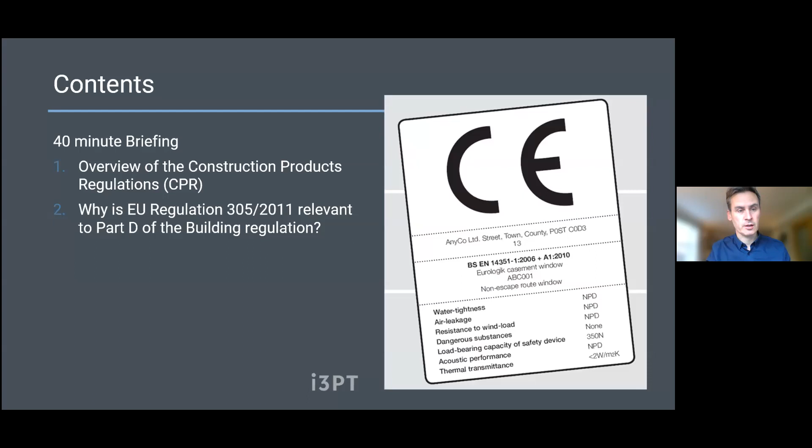So we'll start with the Construction Products Regulation, which is the European directive from 2011, relevant to construction products and how they're certified. We'll then talk about how that has been written into Part D of the building regulations. We'll also look at what products it applies to. It doesn't apply to all products, but there's a list of approximately 450 products in an EU database covered by harmonized standards. And what if the product has no standard? We'll look at that as well.

We'll also talk about the duties and responsibilities. So who's responsible for fitness of purpose? And then we'll get into some case studies and known risks, specific to certification risk, and also to things like structural components.

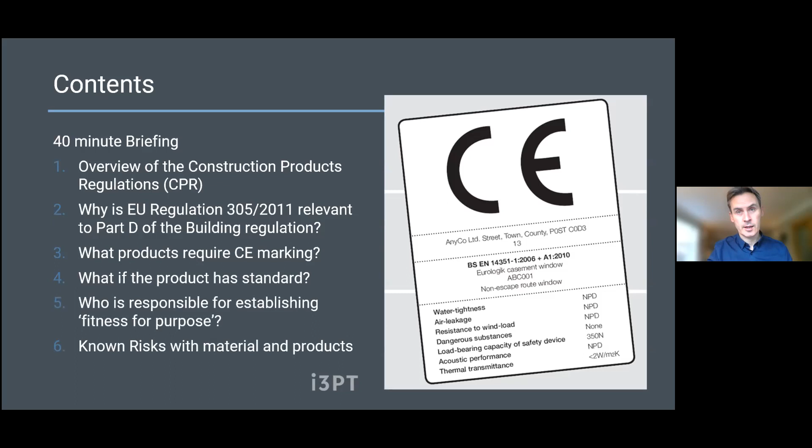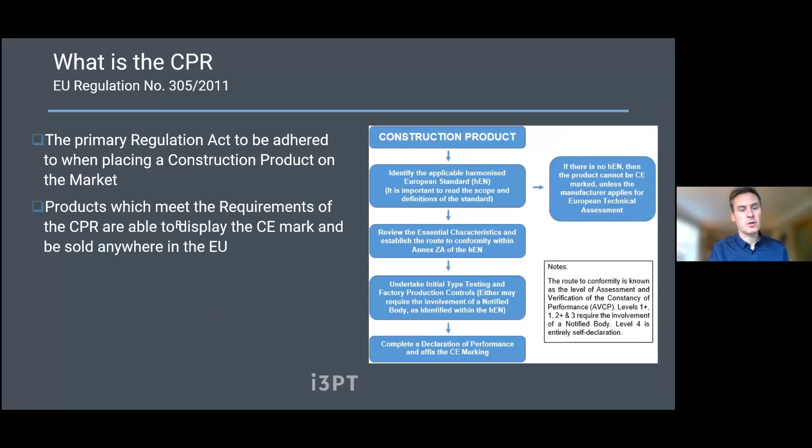So the Construction Products Regulation, also known as Regulation 305 of 2011, is the primary regulation to be adhered to when placing a product on the market. Manufacturers have responsibility for understanding the CPR and for adhering to its requirements where particular standards apply to their industry. Products which meet the requirements of the CPR are able to display the CE mark and be sold anywhere in the EU. The CPR applies a system of harmonized technical specifications and an agreed system of verification and constancy of performance.

So for construction products, if you were manufacturing a particular component, let's say you were a steel fabricator, you would identify what the harmonized standard is. So it's EN 1090, and then you would look at what essential characteristics you need to test for and display. Within that standard, at the very back, there's an Annex ZA of that harmonized standard. That will tell you which characteristics need to be measured. In some cases, for glass, it's only one component, but for other products there's maybe 8 or 9 different characteristics - deflection, conductivity, things like that - that need to be displayed on that declaration of performance.

The manufacturer then undertakes specific testing, and then completes a declaration of performance. They write up a declaration of performance, and their notified body, which is the third party, is able to give them permission to affix a CE mark to that declaration of performance. So you can have a declaration of performance without CE marking, but you can only apply CE marking if the DOP meets the harmonized standard's essential characteristics. And if there's no harmonized standard, then CE marking doesn't apply, except where it's voluntary. We'll get into that a bit more.

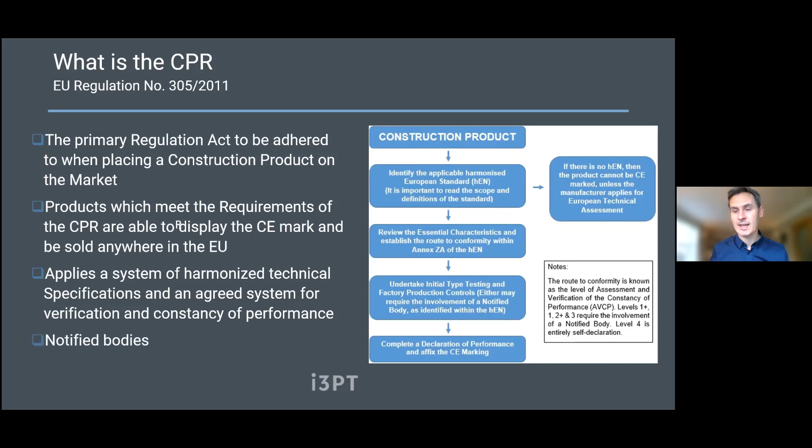So CE marking, it's not a quality mark per se, but it is an indicator that a product has gone through certain procedures, and it does relate to a standard that's harmonized across the previously 28, now 27 countries of the EU. So it's a declaration by the manufacturer that the product meets the requirements of the applicable European regulation. In this case, the Construction Products Regulation, but it could equally be the Lifts Directive or the Machinery Directive or the Electromagnetic Directive. Now, it's designed as a route to market and to break down technical barriers to trade.

It's not designed as a compliance mechanism to say that a product is fit to be used on a construction site in a particular application.

So declarations of performance are compulsory where harmonized European standards exist. Where the standard exists, there's a certain period of time in some standards under which you have to transition from the old standard to the new standard. We saw that with steel fabrication, that they actually needed to have material going through their fabrication units in order to put in place a factory production control system and a quality assurance system. So sometimes there is leeway before the regulation, or between the standard being harmonized and between it being applied.

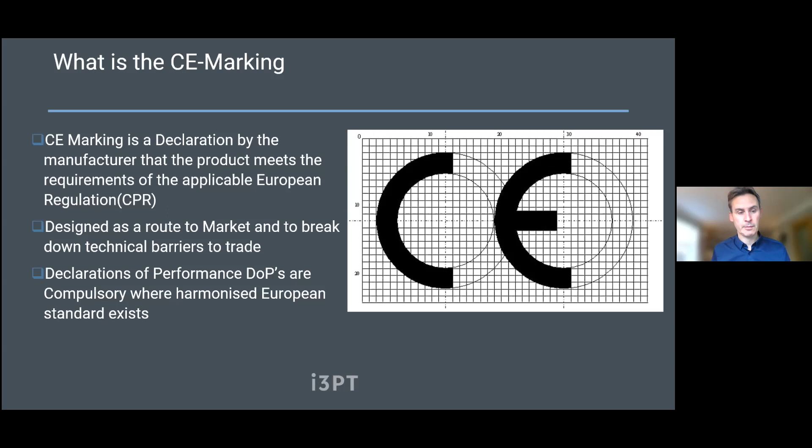So a declaration of performance serves to allow manufacturers provide information on the intended use of the product and the essential characteristics for that declared use. So the essential characteristics are those measures of performance, as I mentioned, the compression, the thermal conductivity, the bending moment, the glass transmittance, U values, things like that, conductivity.

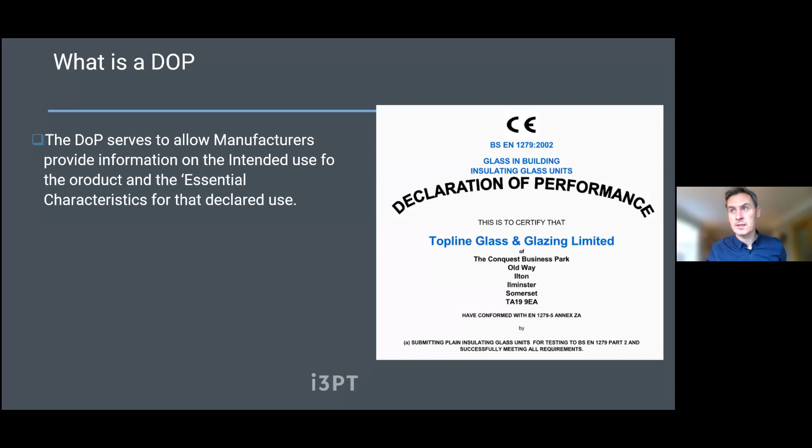So the manufacturer and the distributor assumes responsibility for the conformity of the construction product. So the responsibility primarily with CE marking is with the manufacturer and their agents, their distributors. So the designer or specifier makes choices of products on the basis of information contained in the DOP, using it to source those essential characteristics on which they can use their professional judgment.

So in the case on the right, it's a declaration of performance for glass, and it tells us the company name and it tells us the standard. So this glass conforms with EN 1279, Part 5, and the Annex ZA of that sets the criteria for insulating glass units.

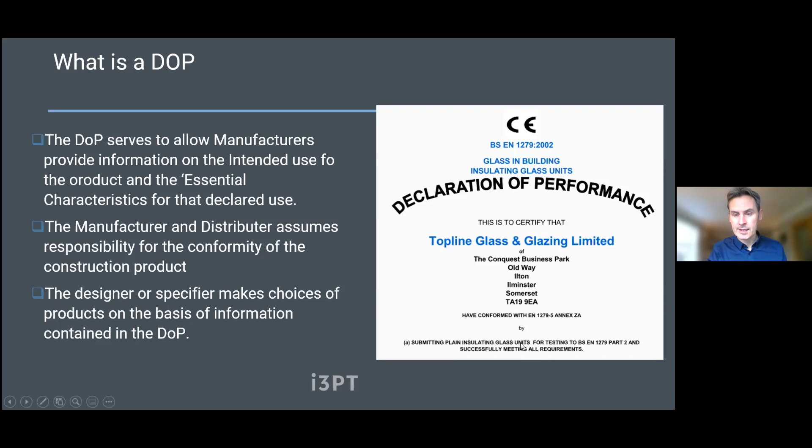So if you're a manufacturer of a product, what are the steps that you have to take? The first route is that you will look at the EU database and you will determine, is there a standard that applies to your industry? If there is an applicable standard, and I can demonstrate where you source that, the NANDO database, that standard will have a list in the Annex ZA of the essential characteristics.

Then you'll determine from that whether you need a third-party notified body. So in Ireland, the notified body of choice really is NSAI, and this is their information. In France, it might be Kiwa, but in the UK, the notified bodies would have been BRE, BBA, Exova.

And the challenge with CE marking is they're no longer recognized for the purpose of EU regulations. So determining if a notified body is required means checking if you need a third party like NSAI to visit your factory, review your tests, or look at your technical specification. That will tell you then what tests you need to do.

So, do you need to do fire testing to work out the reaction to fire? Do you need to do compression testing? Do you need to do heat box testing for conductivity? It'll work out all that. And a lot of those tests, if you're a manufacturer, you probably have them anyway for a product.

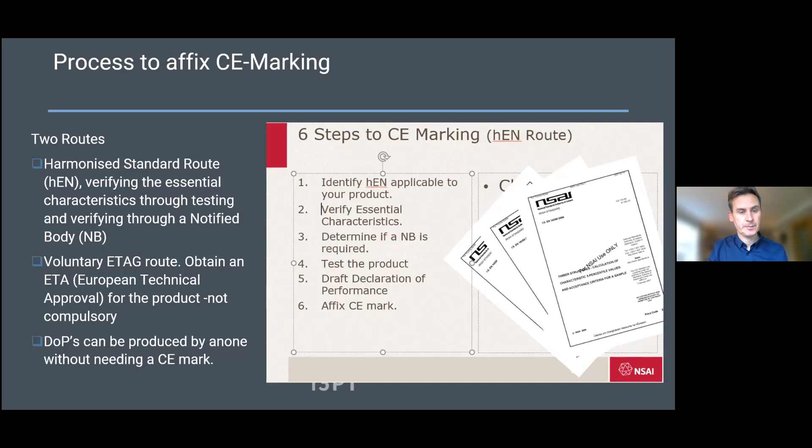So I suppose with that information, we have to see, well, what does CE marking do and what is it not doing? So CE marking is primarily a marketing tool. It's facilitating open access to products across the European market, enabling free movement of goods throughout the EU member states and beyond.

So if you want to choose a block and it's coming from Estonia, you want to know that if you look at the characteristics of that, it's undertaken the same testing, that is measured in the same way as a block that's come from Kilsaran down the road.

It places responsibility with the manufacturer or the importer, whoever's the economic operator that places the product on the market. And it's really about self-certification. A lot of the information is coming from the manufacturer, but being verified by the notified body to one of three levels of veracity, and that's what we get into. They're the AVCP systems. It allows the manufacturer to declare performance and place the product on the market.

But what does it not do? So it's not evidence of compliance in and of itself. It's not a quality mark. It does not on its own provide compliance with national building regs, and it does not necessarily indicate that a product satisfied any pass-fail criteria. So it's a big part of us saying that a material is fit for purpose, but it's not the full story. You can base your professional judgment on it.

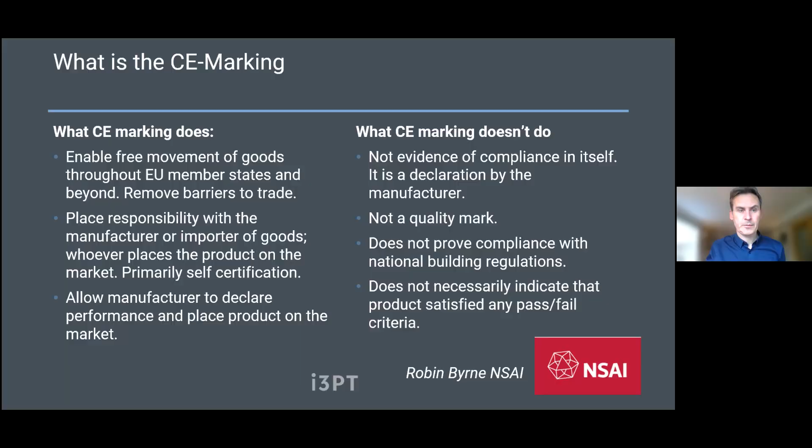Okay, so just going into that. So the purpose of the construction products regulation, that covers, I think it's 447 at last count, construction product standards.

It's mandatory to have a declaration of performance and CE marking for products that fall under those 447 standards. It's the duty of the manufacturer, importer, and distributor. The declarations of performance use AVCP assessments of performance and verification of factory control, and that has to be attested by a third-party body called a notified body.

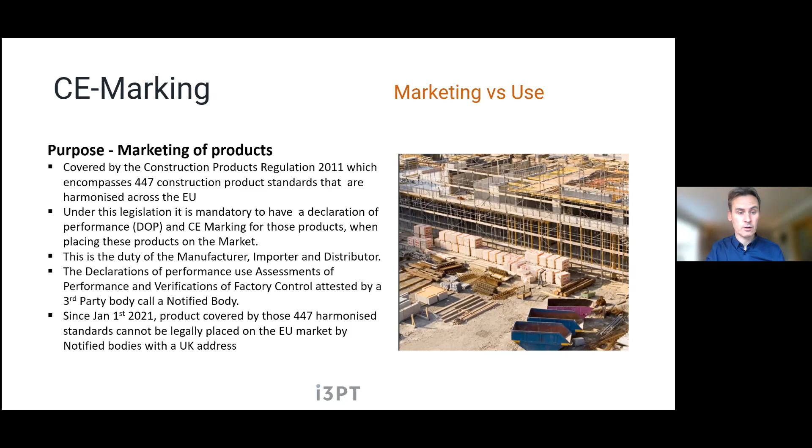And since the 1st of January 2021, the products covered by those 447 harmonized standards, they cannot be legally placed on the EU market where it uses a notified body with a UK address, because they are no longer recognized.

So when we use CE mark products in a construction context, we're relating this back to the Building Control Act and the building regulations, which state that it's the duty of owners, specifiers and builders to ensure product performance is suitable for the end use. So that's fairly generic.

When specifying, procuring and certifying works, there's a duty on all parties to check that the relevant product documentation is appropriate to demonstrate and ensure compliance with the building regulations.

To do that, the specifiers will ensure that where they're using CE mark products, checks are made that the declaration of performance are valid. So being valid means that it has the correct standard listed, it has the correct product class listed, and that the notified body is actually valid.

And that's the issue since Brexit. The UK notified bodies, from the exit day on the 1st of January 2021, they're no longer recognised, okay? So what do you do then?

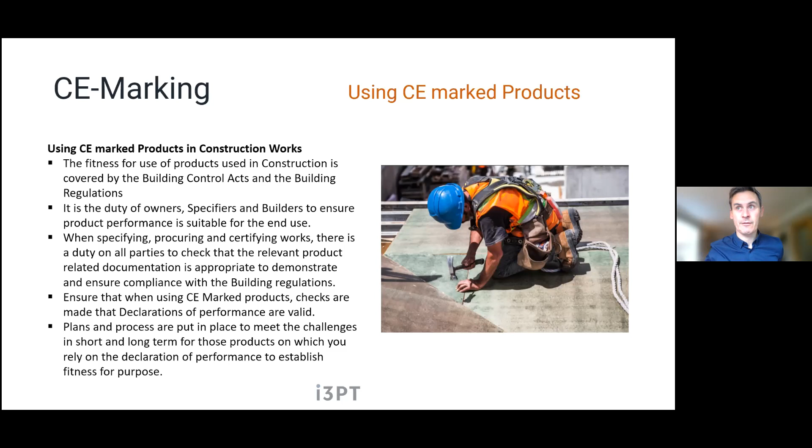And so we've been talking to contractors and project teams to say, have a process in place so you know the products that are high risk in this regard, and try and ensure that those certs are migrated across to EU27 notified bodies, before the product is on site, and if not, before certification.

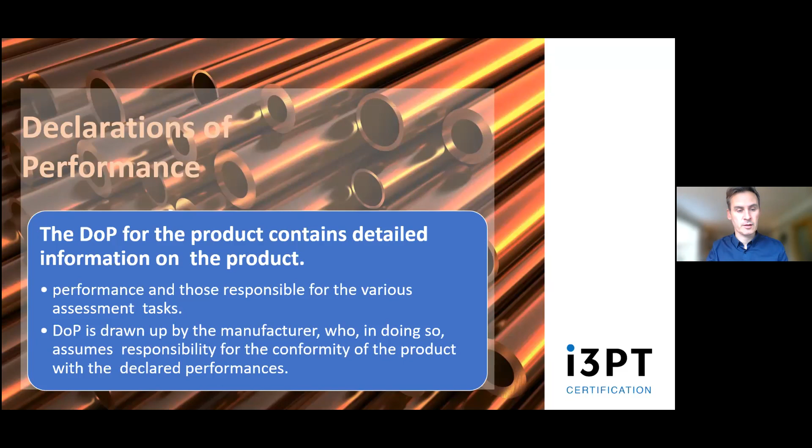So the declaration of performance is probably the key document in all of this. And as we said, it lists the performance for each of the criteria, so each of the assessment tasks, those tests and calculations that are needed to tell you how the product can perform. It's drawn up by the manufacturer, and the manufacturer, therefore, is responsible for conformity of the product with those declared performances.

So alongside the construction products regulation, there's machinery safety directive, low voltage directive, lifts, pressure equipment, EMC. Now, when it comes to equipment, the level of third-party engagement by the notified bodies is generally quite low unless it's related to fire safety.

So in a lot of cases, the machinery directive, they really don't have any tasks for a third-party notified body. And so they're called System 4 AVCP, and therefore a notified body doesn't apply. So for the purpose of this, we're really looking at the construction products regulations.

Now, just to look at the hierarchy of our duty of care, I suppose, as designers, we look at the overarching regulations being the building regulations, and then working down into the individual regulations and their technical guidance document.

So the building regulations refer to proper materials. And how do you know if materials are proper? Well, you need to know that they're fit for their intended use and the conditions of use. So that means, is that particular material suitable for housing in Donegal, for instance?

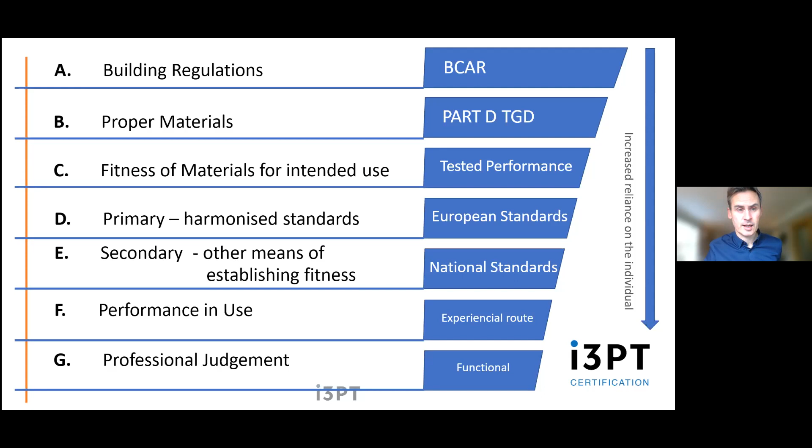But what are the building regs? What's their purpose? What are they supposed to do? So even if you don't meet a specific clause of the building regs, you have to look at the intended purpose, which is to protect people's safety in and around the buildings.

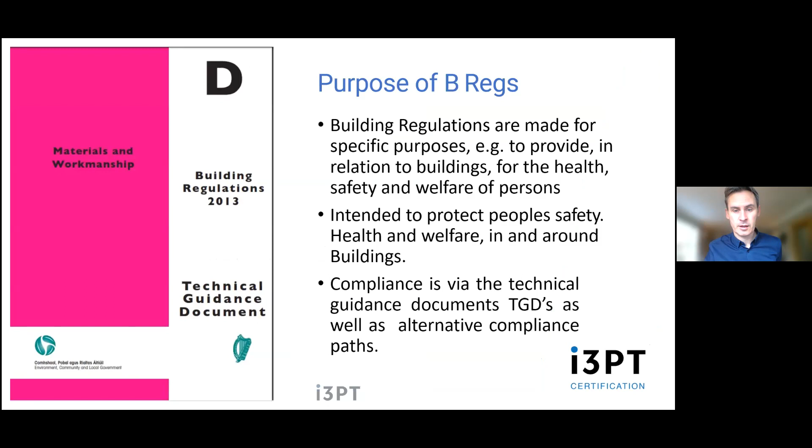Compliance is via the technical guidance documents, and within the technical guidance documents and other standards, they would list what proper materials means in the context of compliance. So fit for the use intended and the conditions of use. And the way that you can demonstrate that, there's 3 routes, but the first one, and they call that the primary route, is that they bear a CE mark in accordance with the provision of the Construction Products Regulation.

So for those, 447 — it's probably changed in the last couple of months, but we'll stick with that number — that's where it's those product classes or materials that bear a CE marking in accordance with the CPR.

So the other route then is, I suppose, where the standard doesn't apply, that you use ETAG, or beyond that, you use Agrément, and the Agrément is not clearly defined how that relates to compliance, because Agrément essentially is a route to market for novel products. That means those products haven't really been tested in use, and there is some risk implied. So an Agrément isn't a cover-all. It simply says that if you use this in a particular way, if you use this combination of products or systems as per the manufacturer's guidance and taking into consideration good design practice, then it's capable of meeting building regulations.

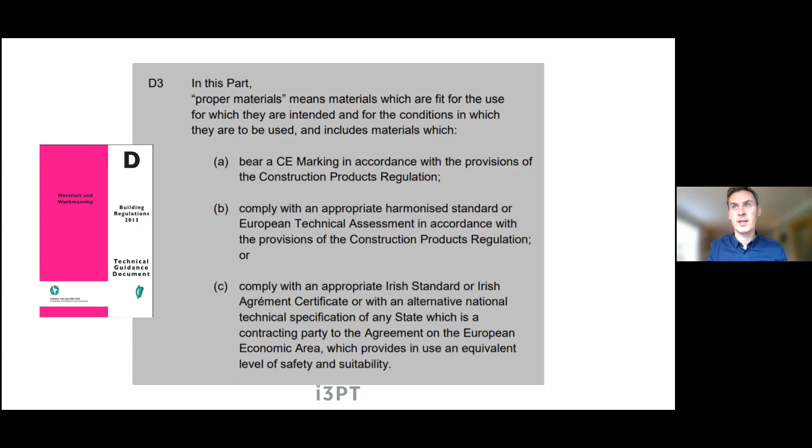And you could do a separate seminar on that, but Sean Balfe of the NSAI has said that Agrément has never been used in a legal case because it's not a statutory document. It doesn't hold any weight. You can't rely on it on its own. It's information that's provided to support taking a building to market.

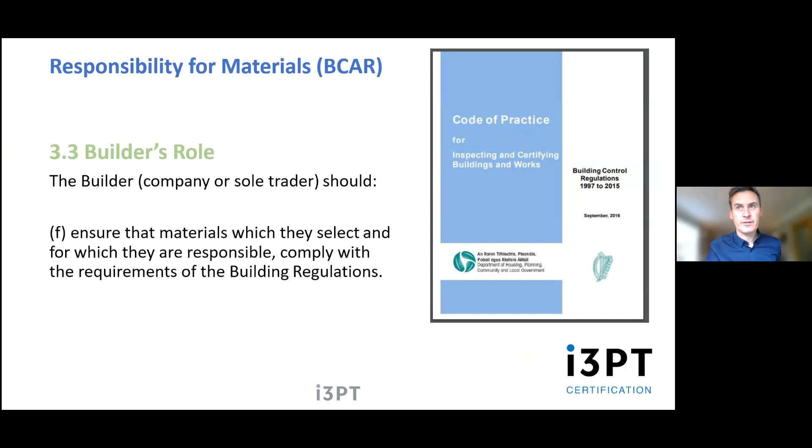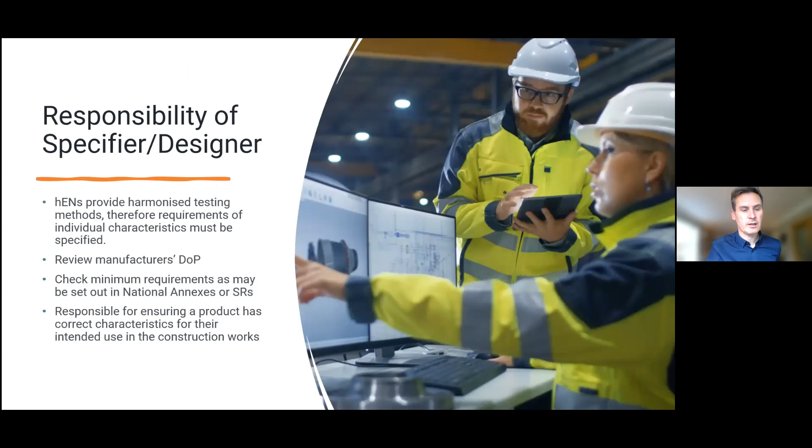So I'll just move on. So the testing houses in the UK, a lot of them have migrated across to the EU. And in terms of responsibility, the code of practice for BCAR states that the builder has responsibility for the materials for which they select. Now, if designers select material, that might be another matter. But the responsibility of designers is to check the minimum requirements, and they're responsible for ensuring the product has the correct characteristics for its intended use in the construction works.

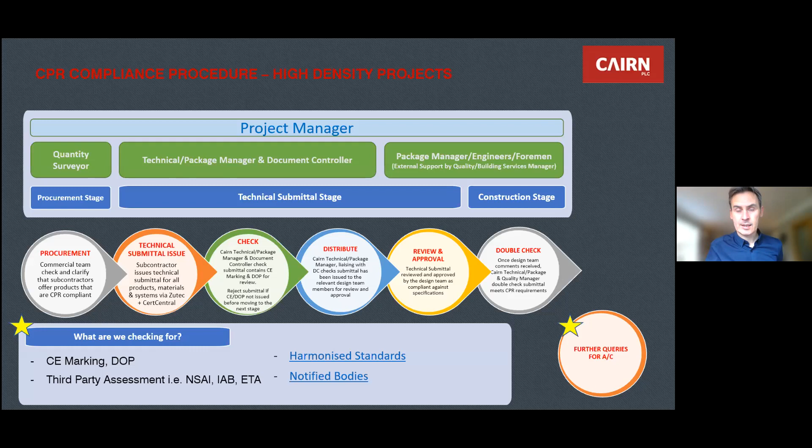There's clauses from the CIF that you can put in your tenders. Some projects, some contractors have very rigorous procedures for technical submittal and for checking the DOPs. And essentially what we're doing is checking the number, like the 0050 in this document, which is the notified body number, and checking that against the database.

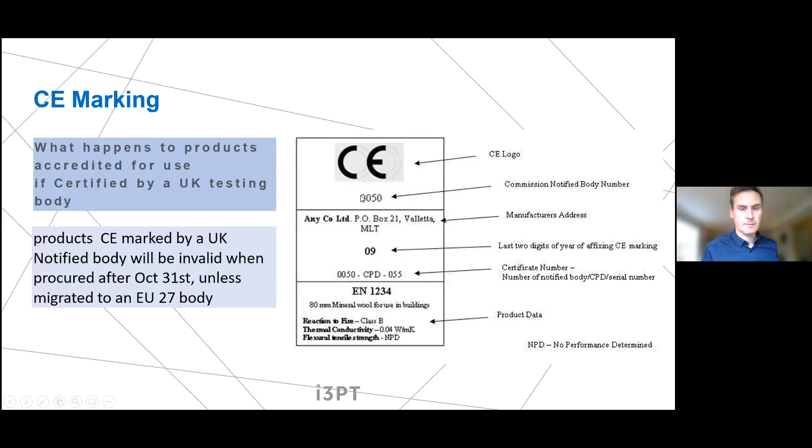On the CE mark, you can see the notified body number, and there are certain checks which have to be done on that. On the declaration of performance, what we're also checking is the System 2 performance, so we're checking the level of verification and performance, and how much oversight the notified body has on that.

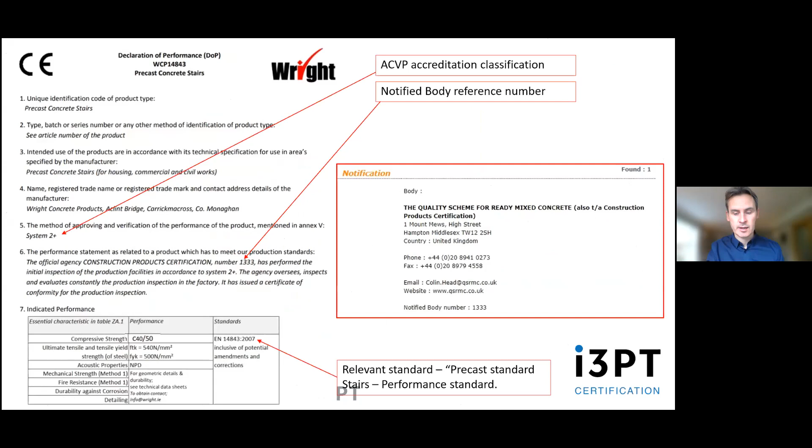There are 5 AVCP levels. The first one, 1+, would be for fire safety products like smoke exhausts or fire dampers, where they do factory production control, visiting the factory to look at the systems and do audits, and they'd also test the system, taking testing from the systems.

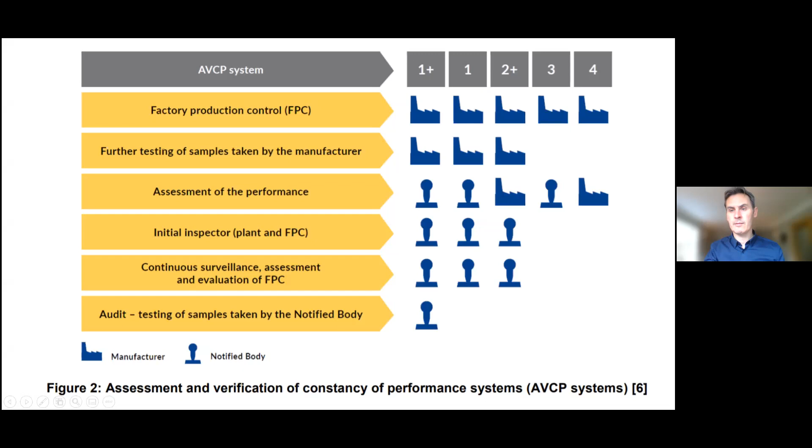As you move down this scale towards 3, you only have an assessment of the performance at AVCP 3. For 4, all the tasks are done by the manufacturer. So if a harmonized standard applies but it's System 4, we can pretty much ignore it.

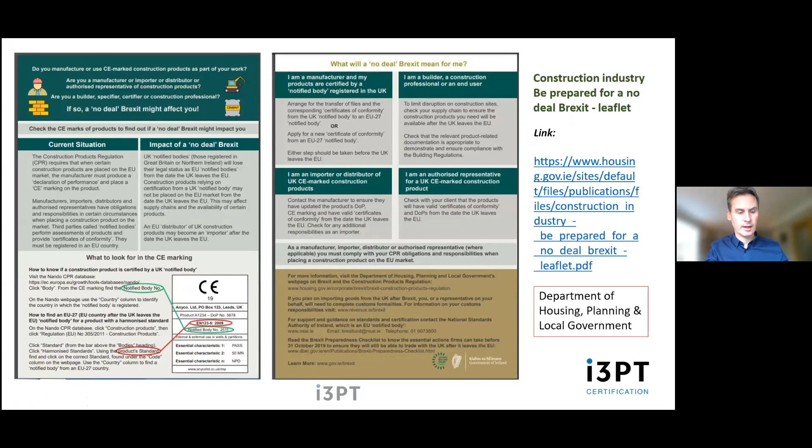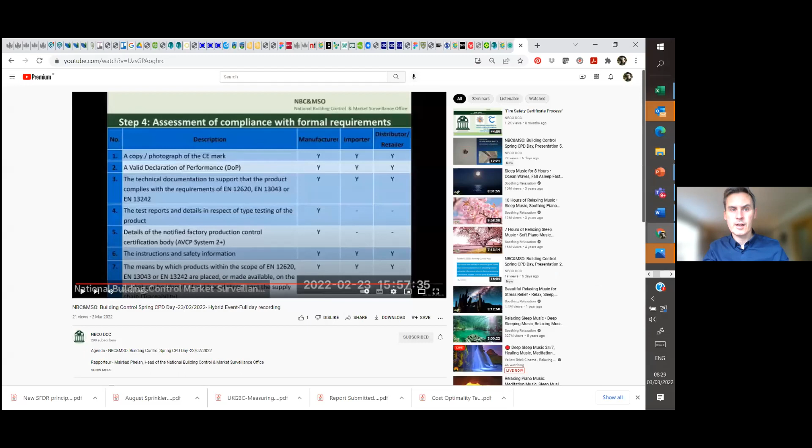There are some good documents available, and you can source that afterwards. But just before my colleague joins, I want to jump into this - building control have also submitted some, or also have some documents on this.

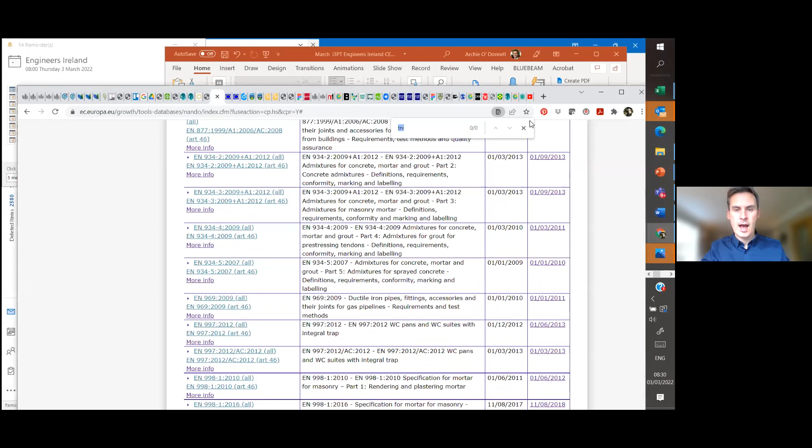There's a link to the Nando database where you have all of the relevant standards. All of these standards are kept live. You can search that using the Control F function and just look for a particular product.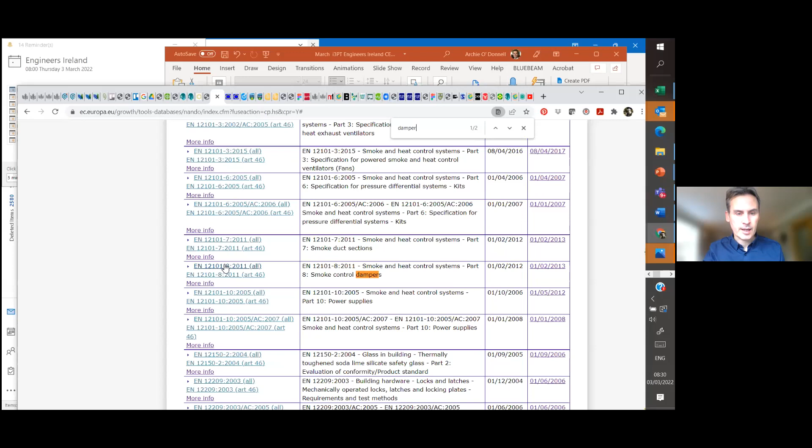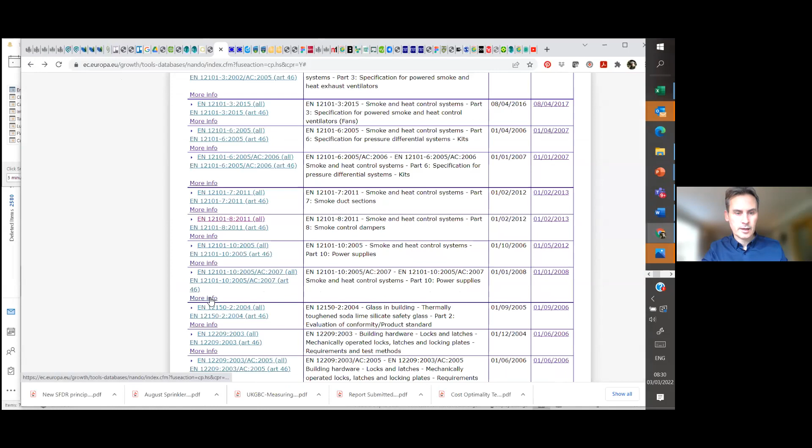So if I look for smoke dampers, I can see that it's EN 12101. If I click on that standard, it will bring up the relevant information for the technical standard that applies. And I can also hit more info here and it will tell me what system that is - fire detection, fire safety, it's System 1, which means it's a high level of external verification.

I'll just pass over to my colleague Stephen to look at some specific industry examples. Thanks Archie and Thomas, and to the Engineers Ireland Project Management Division for this opportunity to give this presentation this morning. I'm going to talk about the post-Brexit CE marking of fabricated steel and precast concrete.

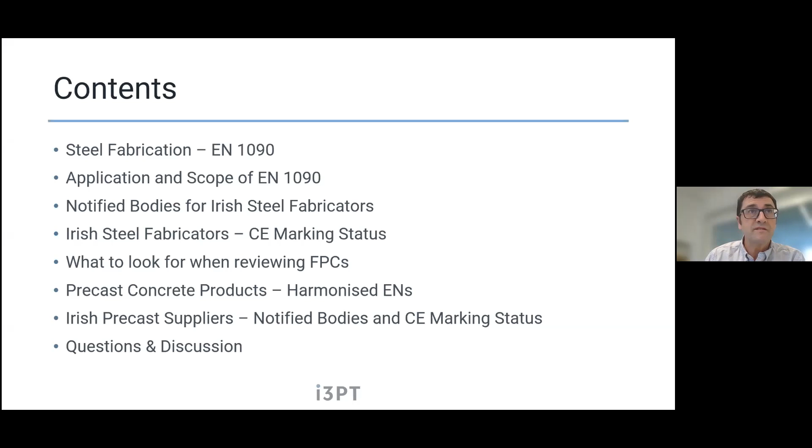I'm going to talk about the steel fabrication and precast concrete products this morning, and the status of Irish steel fabricators with regards to their CE marking and the various notified bodies that are involved. So we'll talk about steel fabrication first.

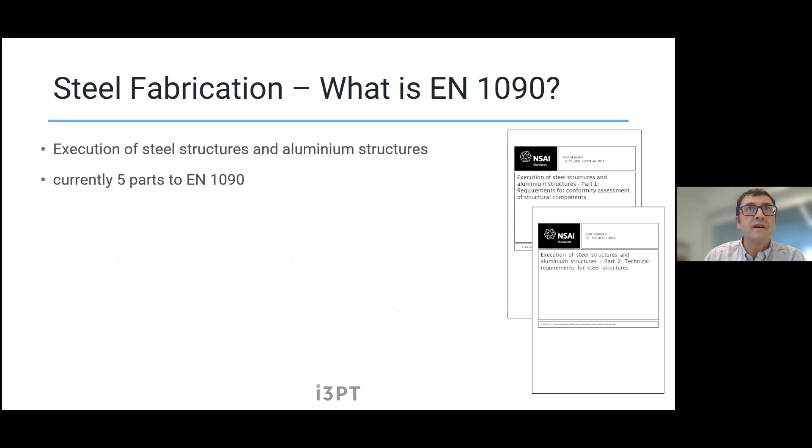EN 1090 is a European standard that comes in 5 parts, and it deals with the execution of steel structures and aluminium structures. Part 1 is the actual harmonized standard - that's the standard you actually declare performance against.

That's the general rules and procedures around putting in place a factory production control system. Parts 2 to 5 are the technical requirements for steel structures, aluminium structures, and elements that may also be manufactured in steel or aluminium. We're primarily concerned with part 2, which is the technical requirements for steel structures.

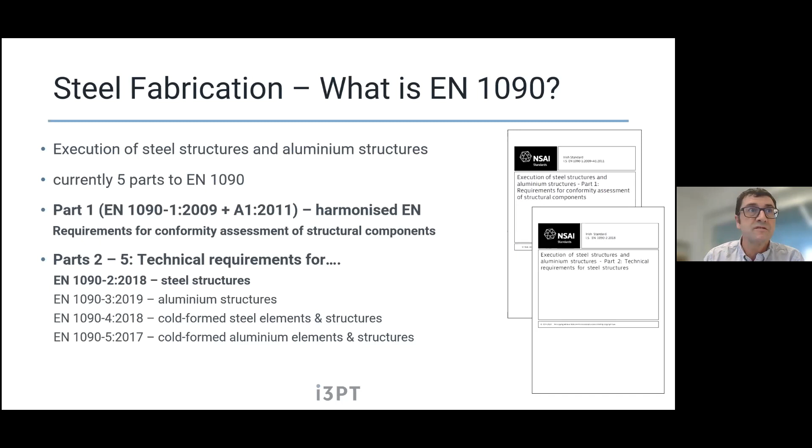Archie just touched on the various different systems in place when a product requires CE marking. Steel fabrication factory production control is in accordance with a 2+ system for assessment and verification of constancy of performance.

The only difference is that testing of samples by the manufacturer - in this case the steel fabricator - is usually not required, because of the one-off nature of steel fabrication. But the 2+ system as it applies to structural steel fabricators has responsibilities for both the notified body and the steel fabricator.

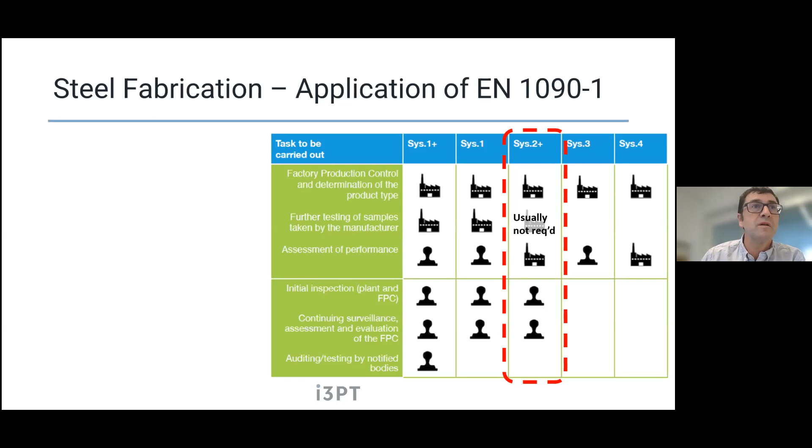It's the responsibility of the steel fabricator to document and implement the factory production control system. When they have this in place, assuming it's certified and validated by the notified body, it allows the steel fabricator to apply CE marking and issue declarations of performance.

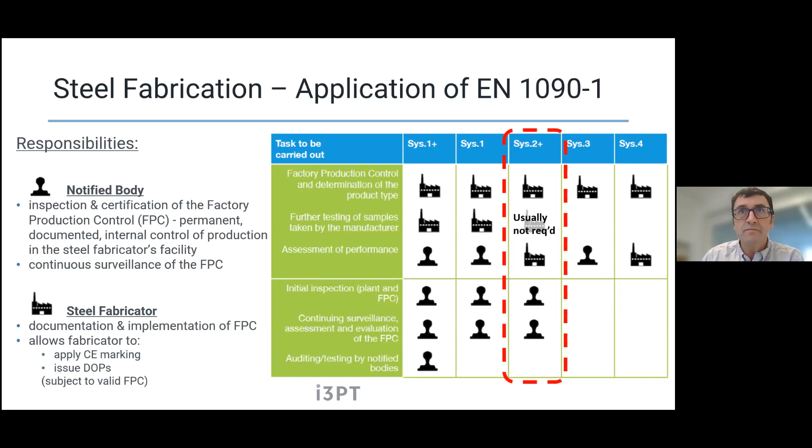It's important to note that the notified body does not have a role in setting up the factory production control system - that's purely the responsibility of the steel fabricator. The role of the notified body is an initial audit, followed up by continuous surveillance at various intervals, depending on the type of work the fabricator does.

Different fabricators have different levels of capability, from execution class 1 to execution class 4. It's not a case that once you have EN 1090 certification you can fabricate for any type of steel building. Execution class 2 will apply for the majority of buildings constructed in Ireland.

It must be specified by the structural engineer. It used to be assumed as execution class 2 if it wasn't specified, but the latest revisions mean it must be specified. It's important that the main contractor appoints a steel fabricator who has a certified execution class greater than or equal to that required for the project.

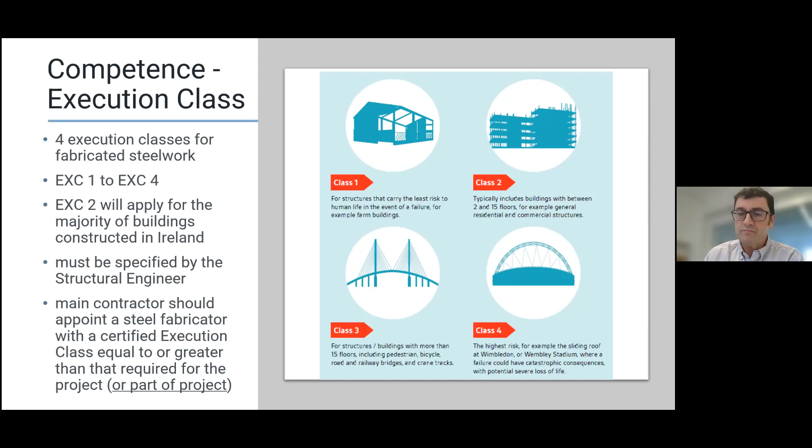So when EN 1090 Part 1 came out, there was some uncertainty as to the actual scope of the standard. There was a consultation process with various national standard bodies, the NSAI, the BSI, etc. And it resulted ultimately in the publication in 2017 of guidelines on implementing EN 1090.

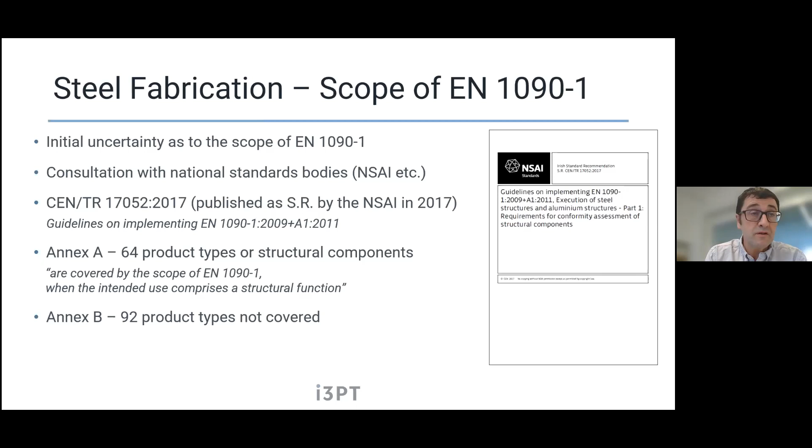This was published as a standard recommendation in 2017 by the NSAI. Annex A includes 64 products that it states are covered by the scope of EN 1090 when the intended use comprises a structural function. Annex B then tries to give an explicit list of products that are definitely not covered by EN 1090 CE marking and the requirement to provide DOPs.

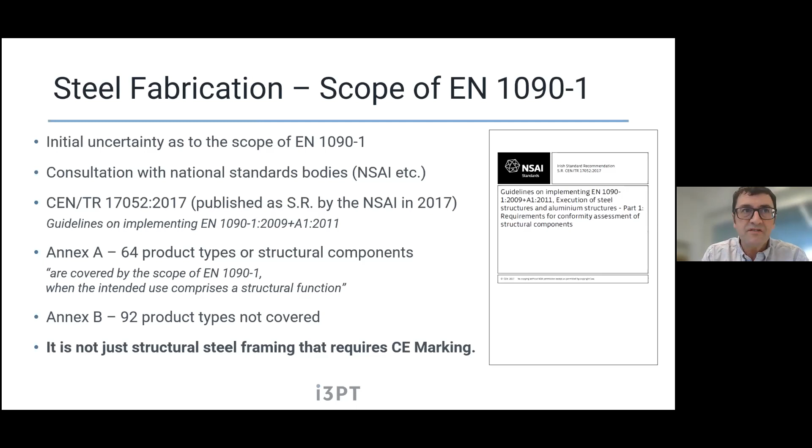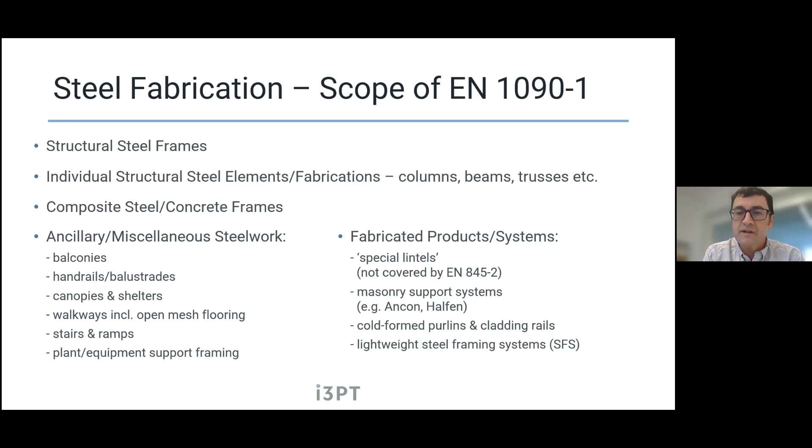But the important point to note is that it's not just the structural steel framing that requires CE marking. It would also include ancillary or miscellaneous steel work such as balconies, handrails, balustrades, canopies and shelters, walkways, stairs and ramps, and also special fabricated products like lintels that are not covered by the harmonized standard for lintels, masonry support systems such as those provided by Ancon, cold form purlins, cladding rails, and SFS type framing systems.

We know that in the last few years there have been 7 notified bodies providing FPC certification to Irish steel fabricators. 3 of them based in the UK, 2 in Ireland, and a couple based on the continent of Europe. The majority of certification of steel fabricators in Ireland is done by the NSAI and Omni, and of those two, Omni I think would have the lion's share.

We're also aware of a further 8 UK-based notified bodies who have been active in recent years. We're not really sure of their level of involvement in terms of certifying Irish-based steel fabricators, but they were operating at a fairly low level in the UK, so I'd say they had limited involvement in the market here.

So I've noted there are some comments regarding the UK-based notified bodies. The SCCS, the Steel Construction Certification Scheme, is a well-known notified body in the UK, but they're not migrating over to an EU27 affiliate. BM TRADA and the Centre for Assessment, based out of Manchester in the UK, have belatedly reached an agreement with some EU27 notified bodies who will be able to issue FPC certificates and welding certificates on their behalf.

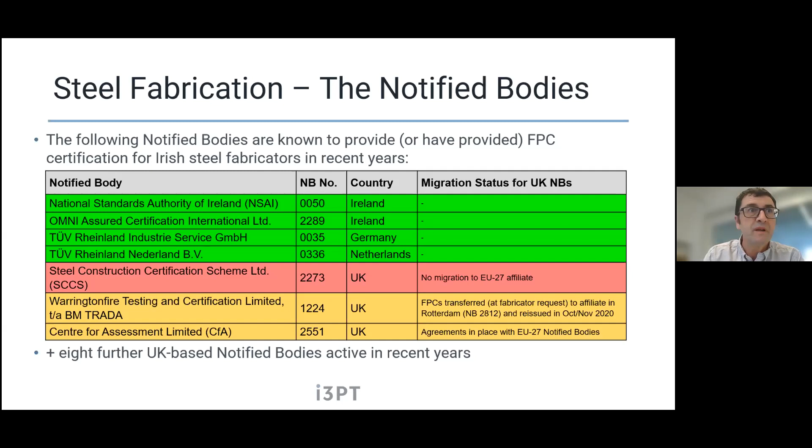So I kind of went down a rabbit hole around this time last year, if I'm being honest, maybe too much time on my hands. We started looking initially at a straw poll of maybe half a dozen steel fabricators just to get a sense of where the industry was, and the rabbit hole went quite deep, and we ended up looking at over 230 steel fabricators.

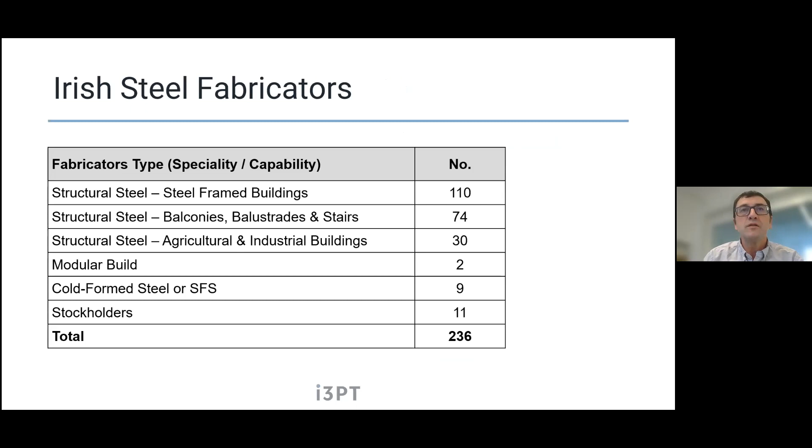So I think that's where the focus would need to be if we were actually looking at projects and seeing where the problems may be, and where the problematic steel may be coming from, from a CE marking point of view. Now, it's important to point out that those figures of 17% and 11% don't necessarily represent market shares of problematic steel work that may be coming to the market. The numbers here are just purely raw numbers of steel fabricators, but it's a good broad range across the industry.

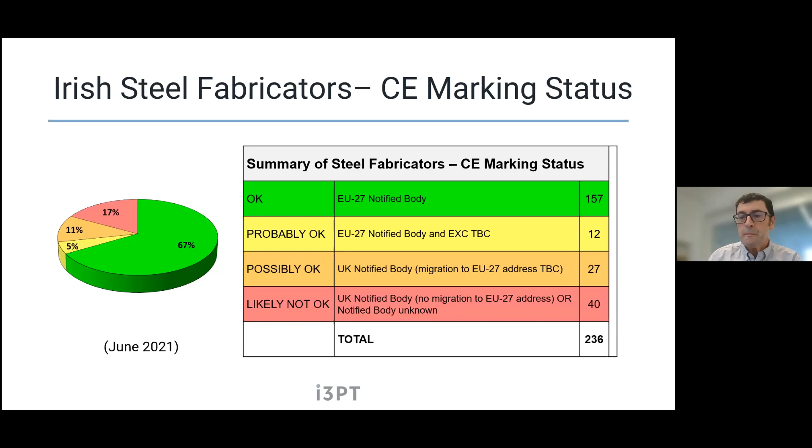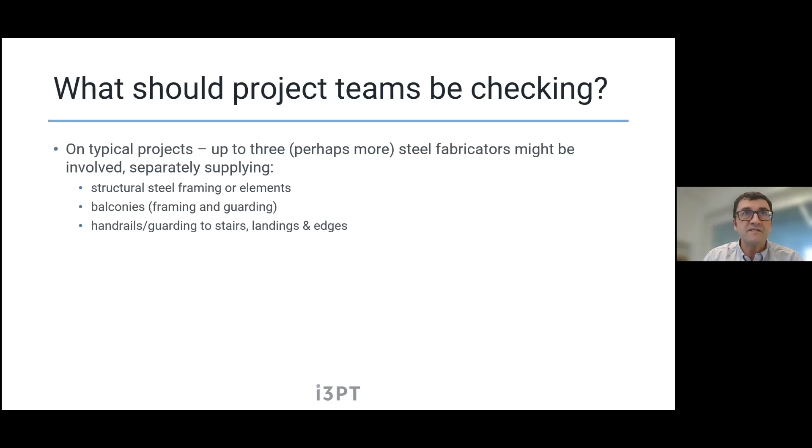So it's an indication of a problem that we feel is still there with steel fabricators, and it requires us, project teams, to be vigilant on this going forward. So what should we be checking as part of our projects? Typically on a project, you may have 3, perhaps more, steel fabricators supplying fabricated steel. You might have one fabricator supplying for the main framing, another supplying for balconies, and another supplying for hoardings, handrails and guardings and things like that.

So we need to review the factory production control certificate, and we need to review the welding certificate, and I'll move on to that shortly as to how we do that. We need to ensure that the FPC certificate includes the appropriate execution class, and we need to ensure that the FPC certificate also covers design. It's important that this review happens at an early stage of the project, and we're not waiting for the DOP to be issued, because in accordance with 1090 Part 1, the DOP is usually issued after the steel is fabricated. So obviously a review cannot wait until that point in time.

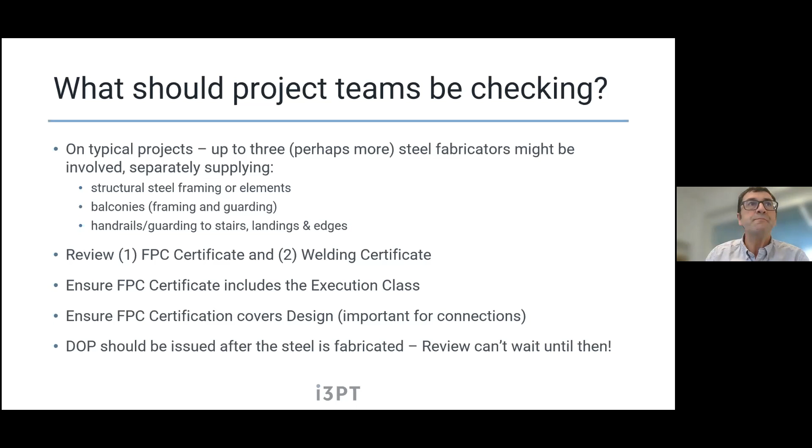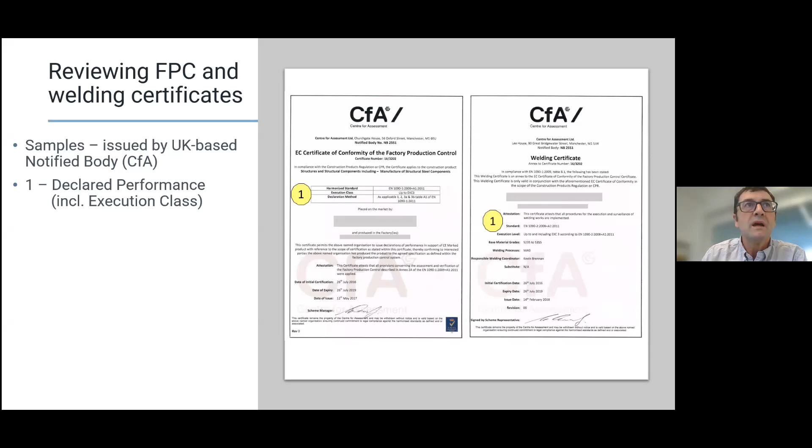So there's 5 essential pieces of information that we want to be looking at. The first of these is the declared performance, which would generally include the execution class for the fabricated steelwork. You can also generally garner from this whether the fabricator is able to design or not.

The base materials and welding is generally covered only on the welding certificate - that's the welding process they're permitted to use, and the strength of materials they're permitted to weld. As you're probably aware, steel has varying strengths from grade S235 up to grade S700, and obviously there's different requirements depending on what grade of steel you're actually welding.

What's also important are the expiry dates, and I'll get back to those shortly as to why I think they're very, very important.

And number 4 is probably the most important information, which is a notified body number. In this case, it's 2551, and that's a UK-based notified body. So if you start seeing factory production control certificates being offered up here for review by project teams, and it has this or other UK-based notified body numbers, you have to seriously start asking questions.

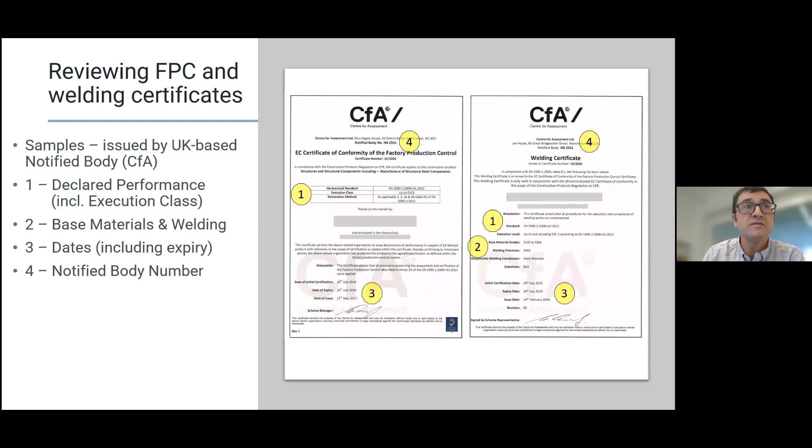And the welding certificate would also usually have the name of the responsible welding coordinator. Now, it's important to note that the fabricator who this cert relates to - I've done my best to blot out their name - but they're now actually certified by OMNI.

And I suppose it's probably a little bit reflective of some confusion that was about in the early part of last year. I spoke with Centre for Assessment around this time last year, to get a sense of where they stood in terms of the status of their factory production control certification, and how that would affect CE marking of Irish steel fabricators. And they didn't seem to have a definitive position on it.

They felt they were in the middle of a transition period, but they were at that time negotiating with notified bodies in Europe who would be able to issue FPC certificates on their behalf.

So that agreement is now in place, and what happens is that Centre for Assessment actually incorporate the procedures of these various notified bodies into what they do, and then the continental-based notified bodies will issue the factory production control certificates and the welding certificates on behalf of Centre for Assessment.

But it's important to note that even though that arrangement is in place, Centre for Assessment still cannot issue the factory production control or welding certs themselves, because the notified body number is a UK notified body.

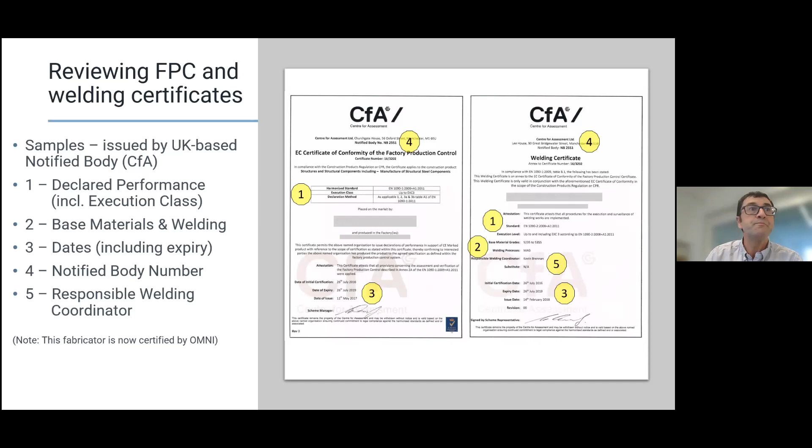So I'll just talk briefly about precast concrete as well. I don't believe the same level of uncertainty is here with precast products as it is with the steel products.

Harmonized standards on precast products have been coming out since 2004, and by 2013, the majority of the harmonized standards covering precast products that we would be concerned with were in place, and in July 2013, it became mandatory to apply CE marking to precast concrete products.

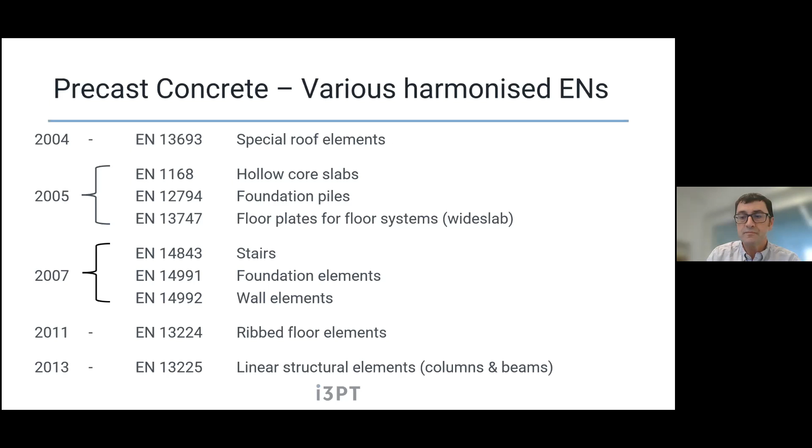So we know the following notified bodies are providing, or have provided until recently, FPC certification for Irish precast suppliers. The vast majority of that is done by the NSAI.

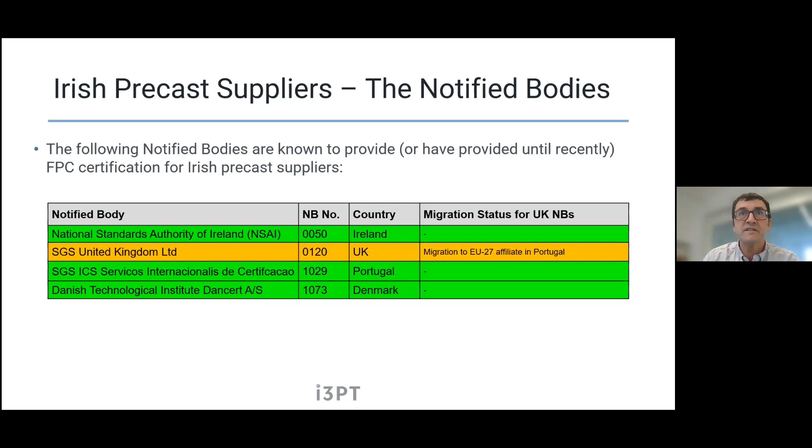There was, up until last year, perhaps half a dozen, maybe 8, maybe 10 prefabricators or precasters in Ireland who were certified via SGS in the UK, but all those certs have now been migrated over to their Portuguese affiliate.

So the situation, the numbers look kind of similar there for precast suppliers when you compare it to the steel fabricators, in terms of those who we don't think are okay, or where there is maybe some question mark.

But to be honest with you, it's just confined to maybe a couple of precasters, maybe in a few areas of the country, in North Munster and across the Midlands. I don't want to be more specific in terms of locations. But to be honest with you, I wouldn't be as concerned about the CE marking status of the precasters as I would be regarding the steel fabricators.

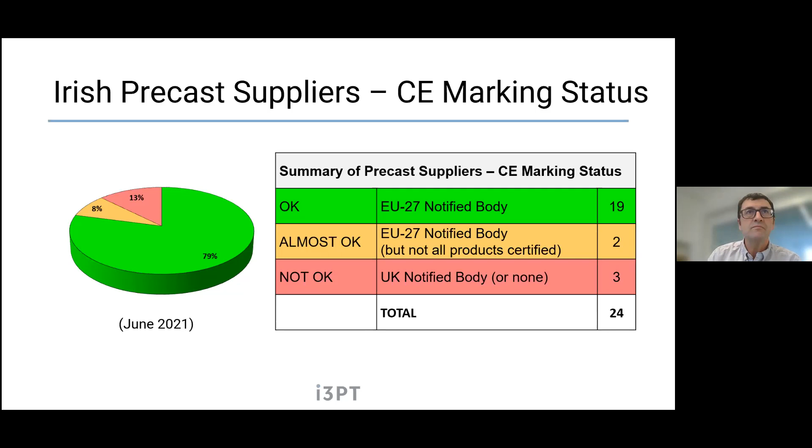So Archie has touched on it there, but I asked, what are the implications of invalid CE marking? Obviously, products are deemed to have been placed on the market illegally, and there are fines of up to €500,000 or potential imprisonment that go along with that.

Technically, it's a breach of a construction contract, because the majority of forms of construction contract, certainly the public works forms, require CE marking to be applied where it's required, and that's usually expressly stated in the contract. If it's not expressly stated in the contract, it's probably in the structural engineer's specification, and that would be deemed to form part of the contract. It would be a breach of contract, I suppose, if CE marking wasn't applied to the steelwork or precast products.

As Archie has touched on, it presents a difficulty in justifying as proper materials under the Building Regulations Part D.

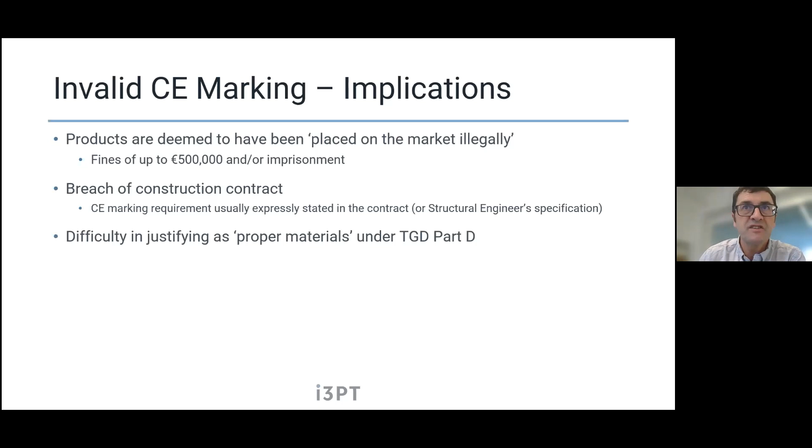And from an insurance perspective, we've heard rumors that people were denied settlements of insurance claims because the structure wasn't CE marked, but we haven't really come across any hard evidence of that being the case. We don't see CE marking status being asked of people when they're submitting proposal forms. But there is a possibility that insurance cover could be denied where a big insurance company is taking on a very large development, and they perform their due diligence to understand the provenance of materials and products incorporated into the building. They may form a view that CE marking hasn't been applied, that's technically illegal, and they won't cover you with insurance. So I think that's something important to be aware of.

So who is policing the construction product regulations in Ireland, particularly post-Brexit? The National Building Control Office Market Surveillance Unit is heavily involved here, but local authorities also have a role. We don't really know outside of Dublin what's happening. Certainly in my experience, in the parts of the country I deal with, down in Munster and the West, we don't know what's happening in terms of local authorities policing the CPR, but I'm sure things will change as we go forward.

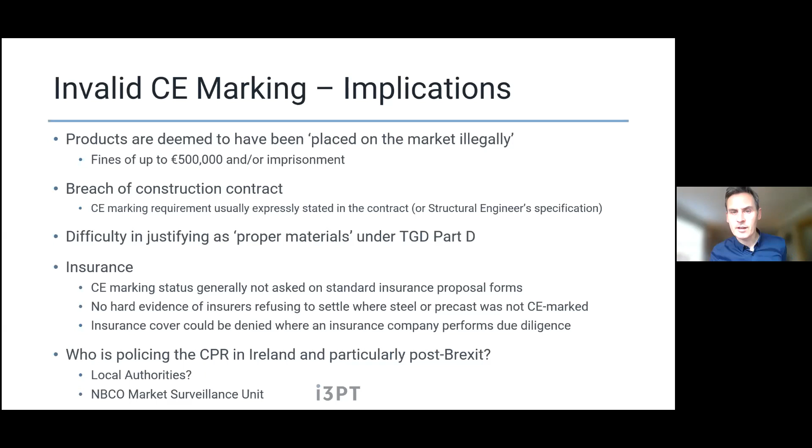Okay, so Keith Elliott has a question. How is the CE mark not a quality mark, and what certification does qualify as a quality mark? The answer is it was never intended as a quality mark. CE marking declares that the essential characteristics listed on the DOP meet the requirements in the standard for measuring those values. So within the standard in Annex ZA, it will say that you have to declare a particular characteristic, what the testing methodology is, and what units are used. That's all that the standard implies.

Very good. Thanks, Archie. Stephen, could you go on mute there? Sorry. Thanks.

So Michael has a question about specifying a scheme in Northern Ireland or the UK. CE marking is recognised in the UK until the end of 2022, when they look for UKCA marking. I understand that's not going particularly well, so they might just extend that and recognise CE marking indefinitely. In Northern Ireland, because of the arrangement Northern Ireland has, European regulatory processes are recognised, so CE marking is recognised in Northern Ireland indefinitely because of the protocol.